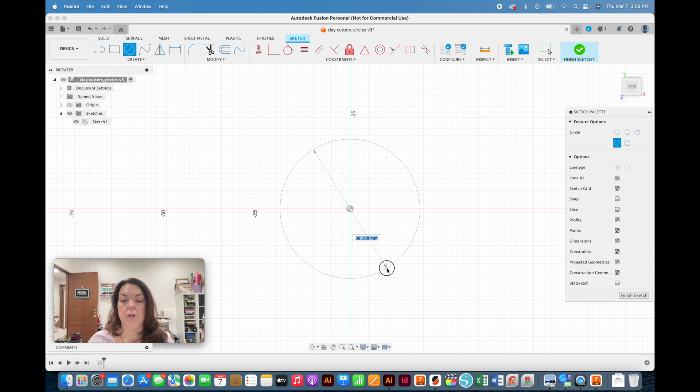I'm going to select this flat plane, and it's going to be a circle, so I'll come up to the corner, find the little circle, and click on that once. I like to start in the middle - not that you have to, but that's just me. I'm going to click and drag, and as you can see, the millimeters are showing as the diameter as I'm dragging this circle. I have my software set up to default to millimeters, but this is a 3-inch circle.

Rather than go and change the settings in my software, this is something I really like about Fusion 360 - I don't have to do any calculations to find out exactly how many millimeters I need. I can just tell it I want a 3-inch circle. So I'm going to simply type 3, and then it has to be lowercase I-N, enter. Now I have a 3-inch circle.

Let me zoom out a little bit. Okay, so I have the sketch for my 3-inch circle, and now I need to build my cookie cutter. This is what my cookie cutter looks like whenever I print it, and I have 3 separate parts.

That I need for my cookie cutter. So I need my cutter wall, and that's this section. I have the first part, which is my cutter wall. I have the second part that is just part way up the wall, and that's kind of a support wall. And then I have the handle.

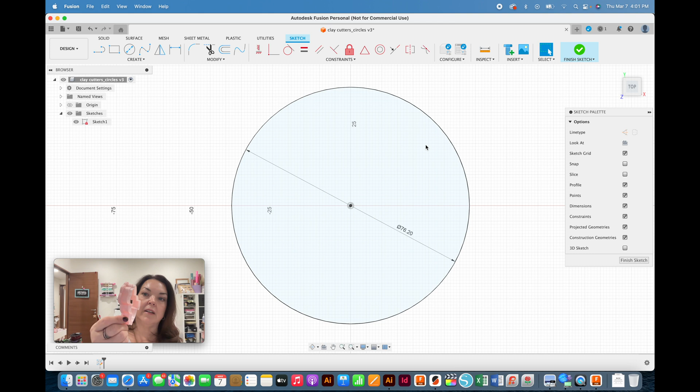So I don't want to have a little tiny thin handle. I like to have a little bit of a thick handle because it's comfortable to push into my clay or my cookie dough. So this is exactly what I'm going to do to build a manual cookie cutter that is very similar to this one that I use the Bella to model and print.

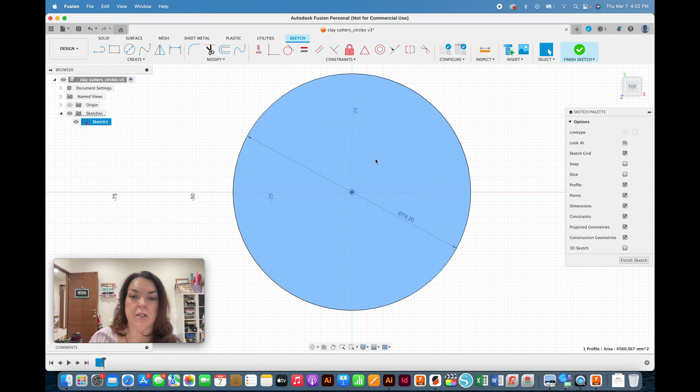We have our circle, and I need to do offsets. The first thing I'm going to do is start with that cutter wall, and for this it's going to be 1 millimeter. So I have not finished my sketch - I want to stay active in the sketch menu, and I want to come up here to my offset panel and click on that.

Now when the offset panel comes up, it tells me to select sketch curves. This is really what I need to do. So I want to select that curve, and it defaults to 1 millimeter, as you can see here, and that's exactly what I want. If I wanted to change it, I could type it - this changes to 3 millimeters, but 1 is all I need. So that's just the default here.

And I'm going to hit OK. So that is this first cutter wall. Now I want to do an offset for the support wall, which again is also going to be 1 millimeter. So I'm going to come back to my offset and select that curve that I just did. Since I've already offset it 1 millimeter, I need to go an additional millimeter, so if I put 1 millimeter, it's going to put it exactly where it already was. So we need to type in 2 millimeters and return. So there's my second offset.

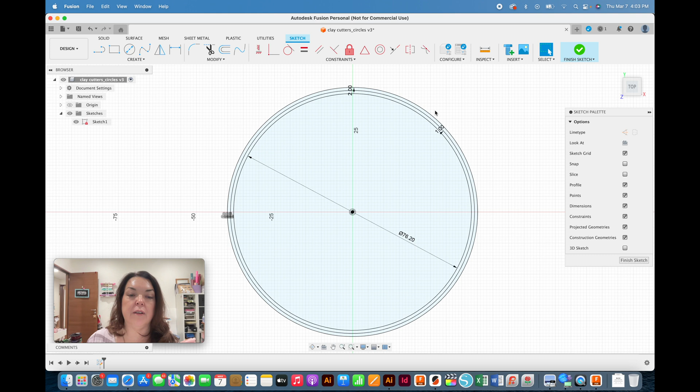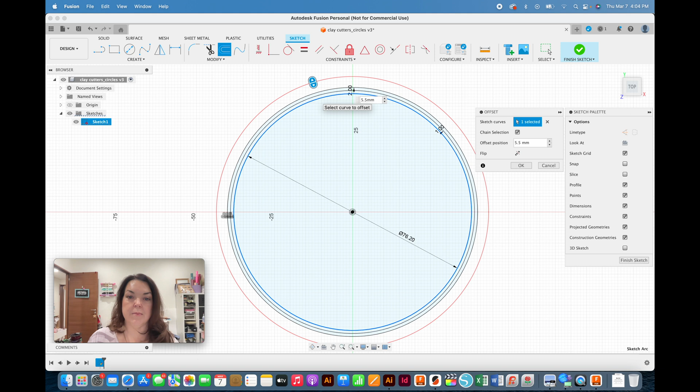And then the very last one would be this handle, and for this handle I like 5.5 millimeters. So I'm going to come back up here for the third time, click on my offset panel, select that circle again, and this time I want it to be 5.5 millimeters. I don't have to type mm at the end because it's defaulted to millimeters, but sometimes it's just habit. So anyway, 5.5 millimeters, and then I hit OK.

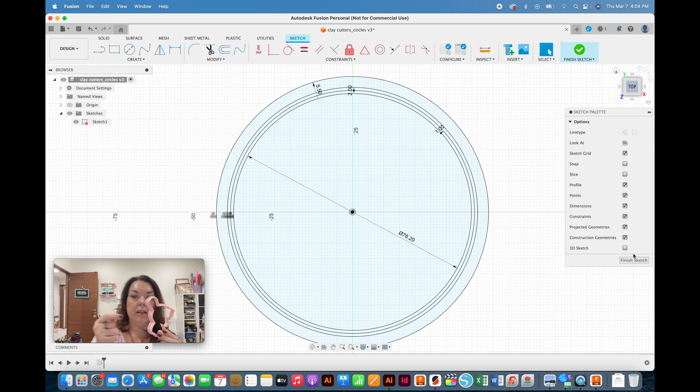So you can see we are ready to then start extruding, and that's all I have to do. All I needed was those 3 parts: cutter wall, support wall, and the handle. So finish the sketch, and now we're ready to start extruding.

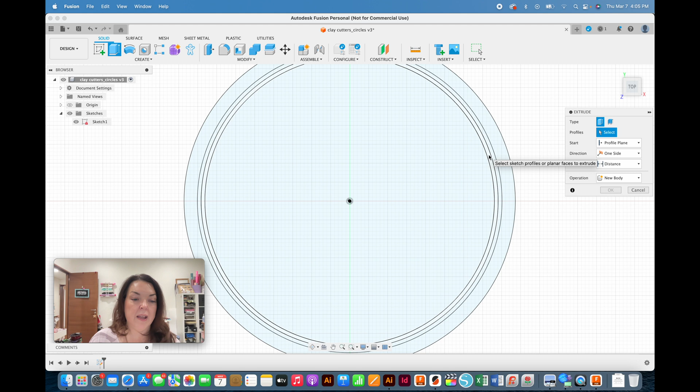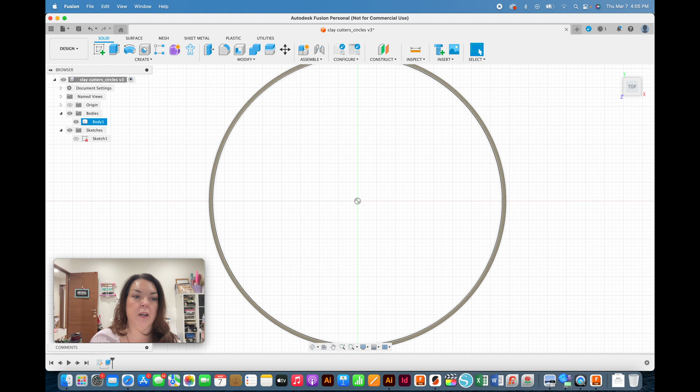Sometimes it's easier to zoom in a little bit because I'm going to have to select this little area between. So come up here to my extrude and click on that, and then select one little piece at a time. I already have my measurements written down, so I know what I want. I like the size that Bella gives me, so I try to mimic this when doing it manually. For this, I want it to be 23 millimeters, so it's just under 1 inch tall, but that's plenty of height for me. Then let me turn my sketches back on. So this right here, we have just built our cutter wall.

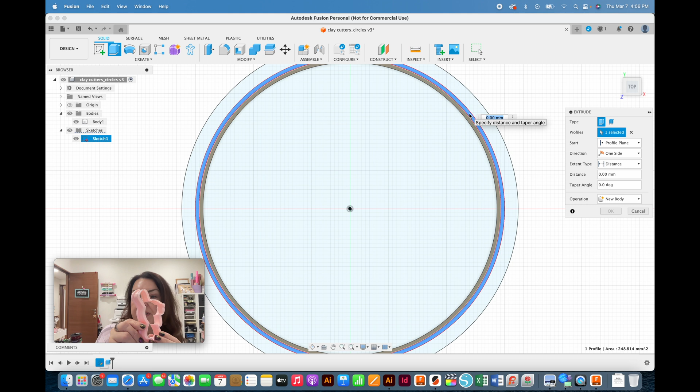Now I need to do the support wall. So I'll come back up here to extrude, and select that little part right there. I don't want to go all the way up with this - as you can see, it doesn't go completely up. I want it to give just a little bit, just the end is what's going to cut, the other one is only supporting. So for this one, I have it set for 17 millimeters, and that gives me a 6 millimeter cut. And you can see where we're going.

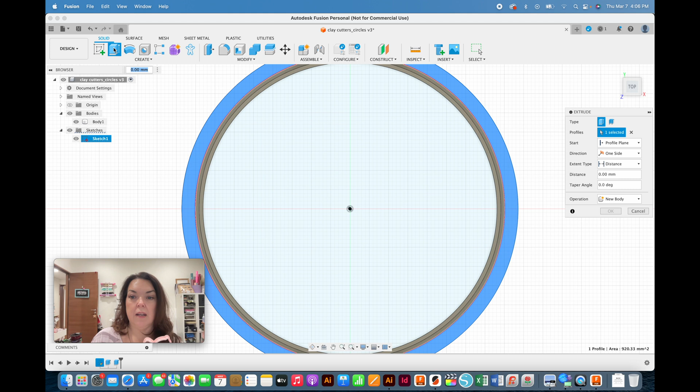And then the last one is the handle, and the handle I have set at 5 millimeters. And I will show you about what that looks like.

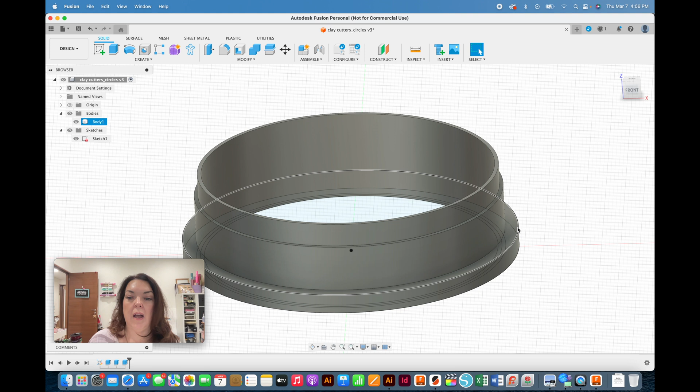Now, the only thing left that Bella does that this didn't do is it also rounds the edges. So you can do that here. You can do them separately, you can do them the same, it doesn't make any difference - that's up to you. I kind of like the top one. You hit that little fillet - I kind of fillet, I really don't know which way you're supposed to say it, but I say fillet. Anyway, so I've selected that top round edge. You can see here what I'm talking about.

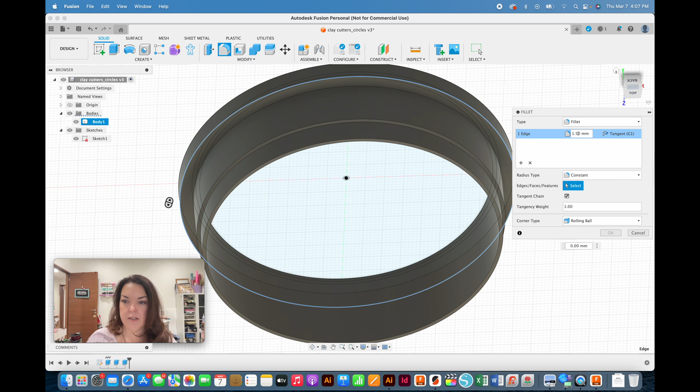This one, and then I'm going to go, I think, 1.5. I don't like a real heavy, I don't like it real heavy, I don't like the curve real steep on this. And then on the bottom, to me, I feel like it just prints better if it's not super rounded, so I like a little bit of a round, but not a lot.

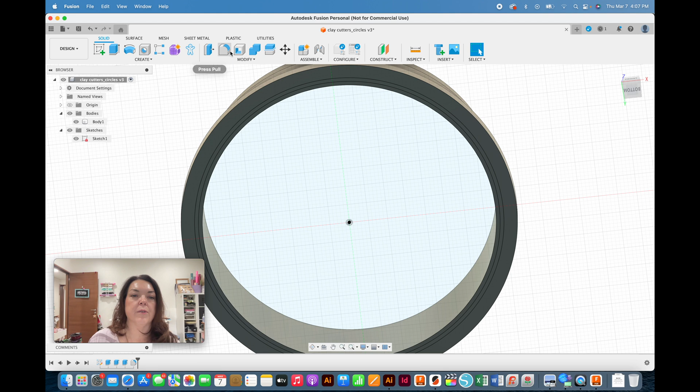So I'm also going to come back and do that fillet again, and then I'm going to grab this. I'm going to select the outer edge - make sure you're selecting that outer edge. And this I'm going to change to 1 millimeter. I think that's enough. And that is what it looks like.

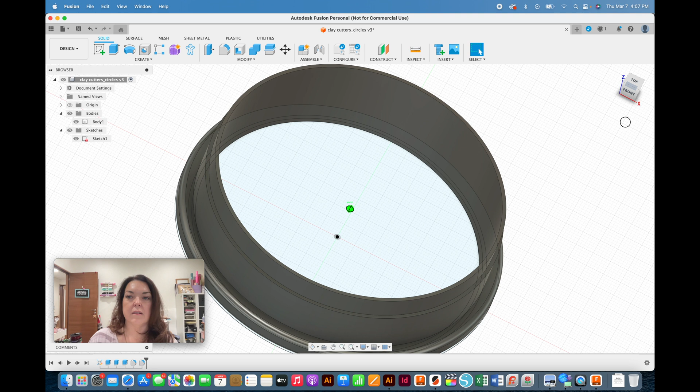So now we have just built our cookie cutter using our sketch panel, with what we did being just a circle and adding 3 offsets to build this cookie cutter. So if you're wanting to make cookie cutters and you prefer something like this, this is how easy it is. It's pretty quick, it's pretty easy, and once you get used to it, you can zoom right through it. So this is another option if you want to make these and you don't want to spend the extra money to purchase add-ons and things like that.